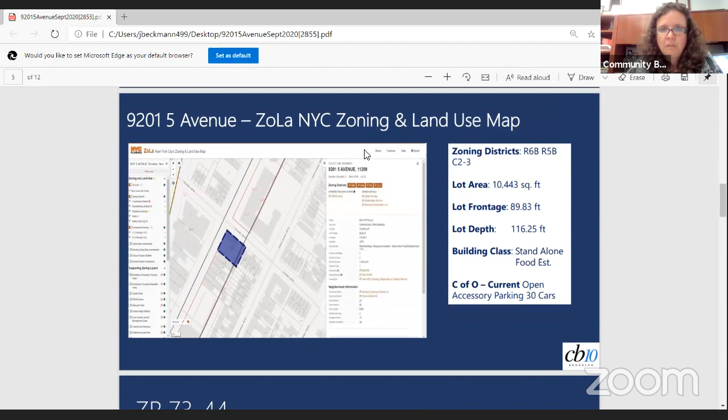Now, there were a number of great questions raised by the community board last time. I will speak to those, and if there's any additional questions about the application of those, we can address them. One of the key questions was whether it would be possible to relocate any of the floor area on the first floor up to the 3rd floor.

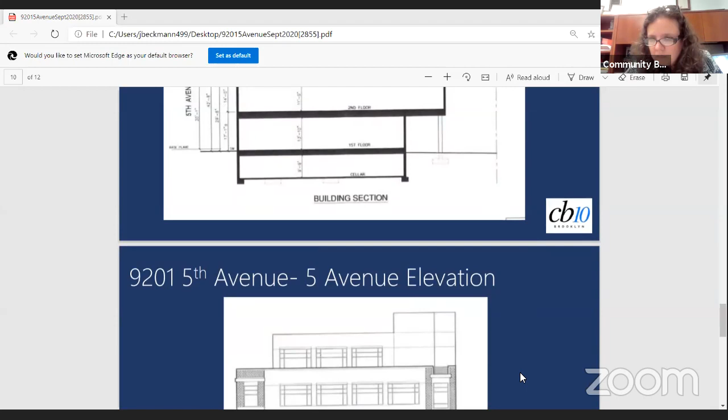Because the 3rd floor is a partial story, it's only 4,959 square feet, as opposed to the larger 2nd and 1st floor. The thought was that if you could relocate some of that area to the upper floor, that could provide more parking or more space at the ground level. However, because of height and setback requirements in this district, confirmed with the architect, you're limited, and the partial 3rd floor is all that would be allowed by the bulk district. We can't extend to the full extent. So that's why the building is designed that way.

There was also a question about the drop-off and perhaps patients coming to the medical uses located on the upper story. So we went back and had a long talk with the architect and property owners about the idea of these 6 accessory spaces. As an alternative, could we remove one, some, or all of them in order to provide a turnaround, or a loading and unloading area? In case you had an aide come in, or were dropping off patients, depending on the nature of the medical use, you could have a patient drop-off area.

I would say 2 things to that. First, the property owners thought that was a great idea, and they're very open to it. The architect said that could be done. However, we did not create any new plans for it at this point, for 2 reasons. First, we recently had a Board of Standards and Appeals hearing date assigned for November 9th, 2020. So you can mark that in your calendar. That's the first hearing date we had before the commissioners of the BSA.

The thought was that they did not want to redesign everything at this juncture because they wanted to have the hearing date first. But at the hearing, we would tell the BSA that if they had a preference one way or another, we would be more than welcome to explore those designs. The short of it is, especially with the current BSA, we tend to not do too much design before the first hearing, because often we'll redesign and then they'll come back with comments saying they want us to change everything we changed.

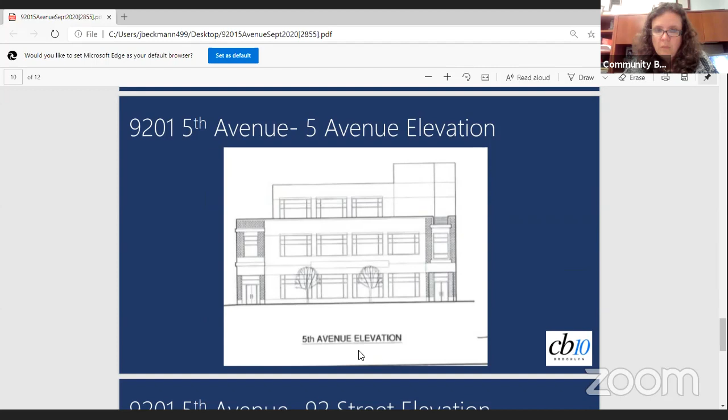There were questions last time about whether we could shift it the other way and have access from Fifth Avenue instead of 92nd Street. That doesn't end up working, both because of the desire to maintain open space in that area, but also importantly because the zoning district's commercial overlay only extends, I believe, 100 feet from Fifth Avenue. So you can't actually have commercial space in that area, because that would be putting commercial space in a residential district. You could put community facility there, but not commercial.

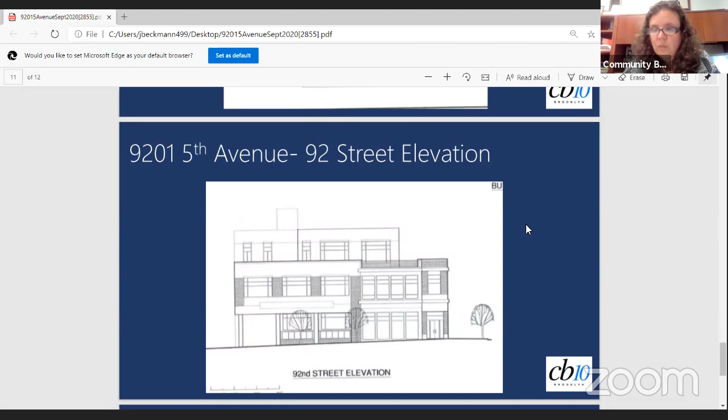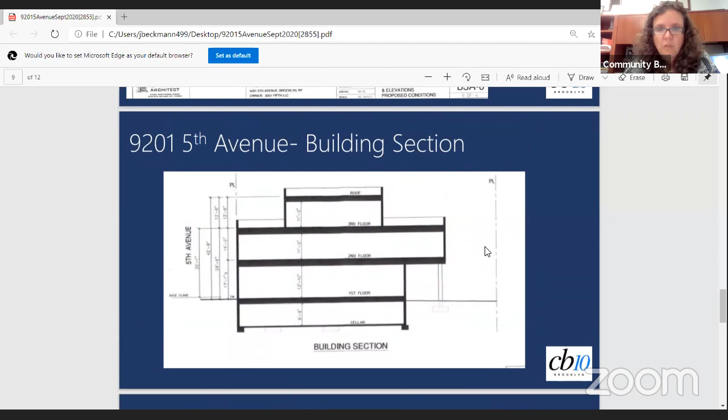With the floor plan designed to keep one floor consistent with one use, that's why it has to be located over towards Fifth Avenue—you can't have an illegal use in something you're proposing. So that's my long-winded background on the application and the points raised in the questions. If there are any follow-up questions, I'm happy to address them. One thing I'd say is we appreciated the comments raised, and the property owner's architect thought they were a very good idea and is open to it, pending BSA comment.

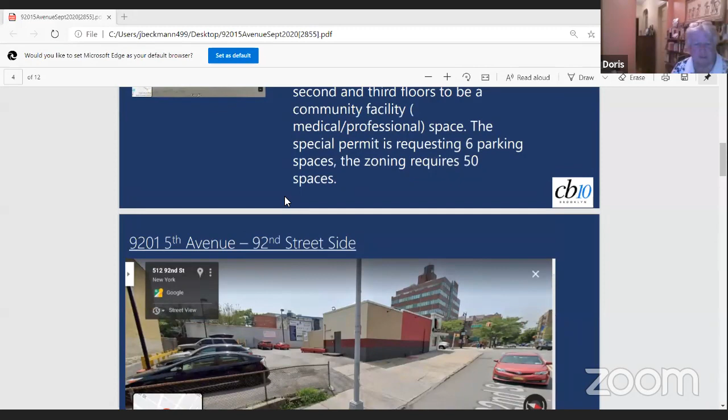This is Doris Cruz, the chair. I live very close to the area and am very familiar with it. I'm concerned that you feel you cannot relocate the access to the property to Fifth Avenue, because access at 92nd Street at many times of the day will be very problematic.

Other than that, any questions from the rest of the committee? Come on, guys, you're never that quiet. Because I talked too long, that's why. Sorry—what does BSA stand for?

Board of Standards and Appeals. And the FAR is Floor Area Ratio. Got it—we're going to get you an acronym book and a zoning regulations book. Yes, and after this meeting we're going to speak to one of our fellows who's working on that. So you're going to be so happy. Amazing, thank you. You're welcome.

Just a heads up, if you go to the Department of City Planning website, they have an online zoning resolution, and the last time I checked, they had a glossary of some key terms. So in addition to explaining it here, you can look at the Department of City Planning website.

Thank you. Yeah, the lingo's second nature to me, so I start throwing it out and don't even think about it. Certain things, some are more obscure, and we do tend to try to explain them, but it's very important that we make that clear to everybody. It helps us as committee members know that we're reaching everyone.

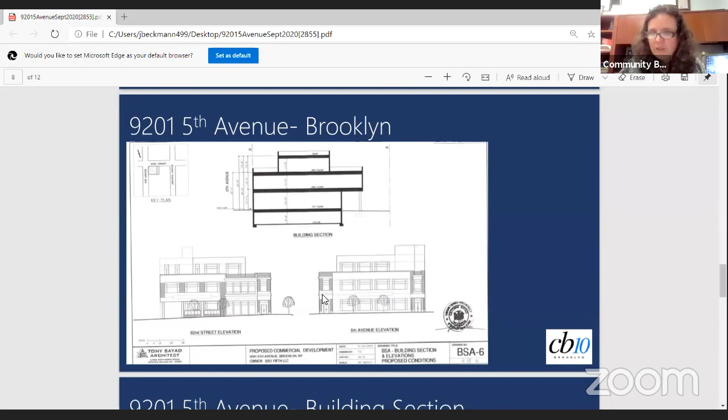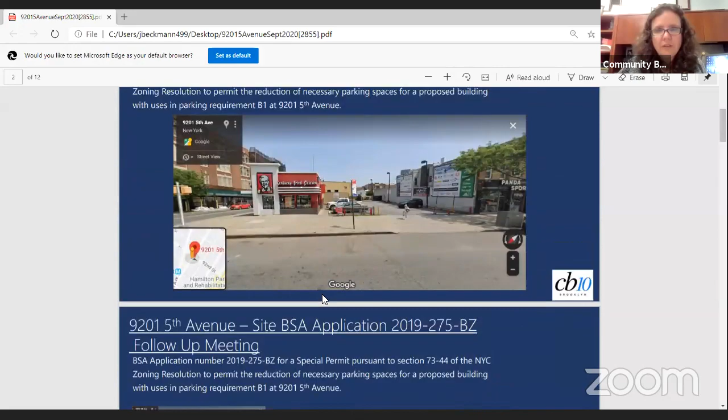Is this what you want, Joe—the elevations and section? That's the building section, keep going, keep going, the floor plans will be the other way, most likely. It's probably BSA-1 or BSA-2. I didn't see it—no, I don't think so. It was in the email you sent. Well, maybe you already sent it, okay. Yeah, these were just slides I made up. All right, let me try and share my screen from my computer. Okay, I'm going to stop sharing and then you could share. All right, let's try this—do you see that? Yes, okay, yeah, I do, that's perfect.

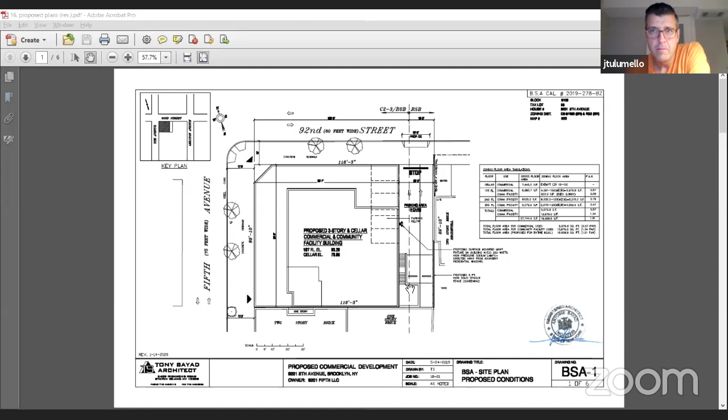You can see it right there—so, you see where your hand is, the little hand here? Yes, yep, okay, you're right about there. I see you have a staircase with a fairly large areaway, that square box, which is the landing, the entrance to the cellar, right here. That's unusually large, and I kind of question why it is that size.

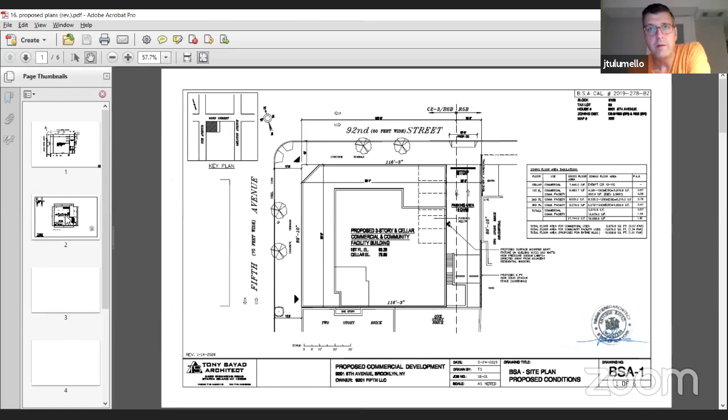That's one comment. The second comment is, given that you are providing some parking spaces, maybe go to the next floor, the first floor plan—that's the cellar floor, so let's go to the first floor plan. How's that? Yeah, perfect, yep, that's it right there. Okay, so where it says 13'8", right down there—that's the areaway for the entrance to the cellar. I kind of question why it is that size.

Second, you have these breezeways carved out right above it where there's a square grid pattern, right here—I'm not sure what the purpose of that is. Potentially, you could take that staircase and tuck it underneath that breezeway and free up some area in the parking area, making the rear back section of the lot large enough for a K-turn or something similar, so an accessory vehicle can get in and out of there. Yeah, 100%, just so you know—sorry to interrupt.

When we were originally doing the sketches with the architect, he actually proposed removing this stair and putting it in here. This is sort of a lobbyish type entrance, and then creating much more of a clear open space back here.

So if you follow my hand, this area coming down like this, and then like this, and then like this, over like that, that would all be a paved area. So it did provide an option for a little bit of a turnaround.

And it might be possible, to be honest, since we don't use these parking spaces right here, if these parking spaces were removed, conceivably this wall that I'm speaking at, he talked about possibly moving that out a little bit here and moving this wall in to make it a more even setup.

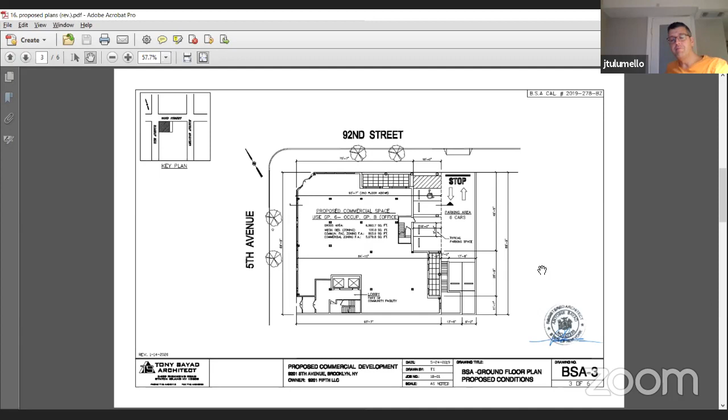Okay, that's all I had. I'm good. Okay, thank you, Joe. Yeah.

Let's see, I don't see anyone else with their hands raised, Doris, so that's okay. I just raised mine. Okay.

I think there's very good intent here, but I'm concerned about making a decision or a possible approval without really seeing the final design. We don't really know what we're opting in for here.

If I could just speak to that, what I would say is, just so your board is aware, any revision to the plans would be required to be sent to the community board. So you would see copies of a revised plan if the BSA said, yes, we like that idea, we want you to explore that idea.

So normally we just send the copies of the submission out, but in this instance, what I could do is, since I've been in contact with Dorothy a lot, I can directly double check and make sure it's received by the community board.

And I'd also include information about any BSA dates, so that Community Board 10 would have the option to weigh in either in person or in writing at the hearing.

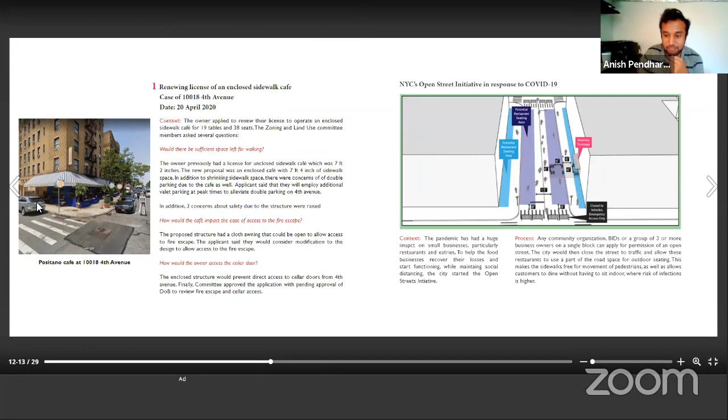And then there will also be a section on terms - for example, what is BSA, what is FAR, things like that, a basic introduction to all these common terms. And there are different chapters for each of these types of applications: public school, or what is the ULURP process, what are the components to it, what is the timeline for it, and things like that.

I'll just scroll - special permits, and here we are today. Actually, this is the same case which we were discussing today. I took it from the last community board's minutes report. So yeah, things like this.

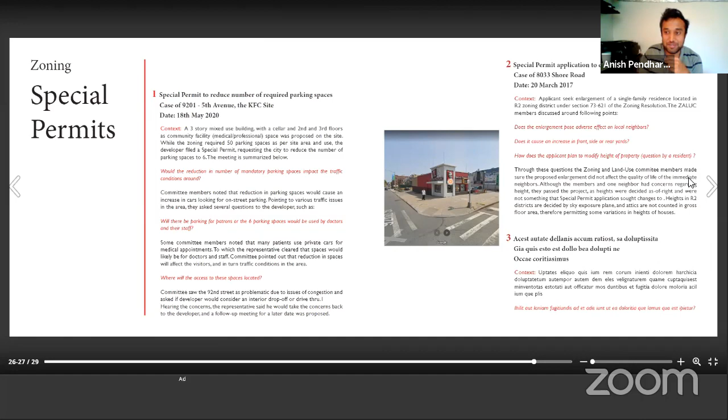So this is a basic draft, and I'm still working on it. I just wanted to get your comments on how to make it better.

I think it's going to be very helpful. I think having a quick acronym page maybe would help. Oh yes, we used acronyms - a quick view. Sure.

What I like about this is that the Department of City Planning has their own guide we can all look at, but this is great because it's customized toward Bay Ridge. When you look at the DCP guide, there's stuff about skyscrapers in there, and we obviously don't need to see that. So this uses case studies, stuff that we commonly see. That's why I think this is more useful - it distills it for us, instead of having to go through all these other types of land zoning and land use things that we are never going to see here.

Also, to Michael's point, Anish, maybe we could have a page or two about the special Bay Ridge district, because that's unique in the zoning resolution for us here in District 10. And maybe just a couple of paragraphs about the background of the rezonings that took place in '05 and '07. Yeah, that's a good idea.